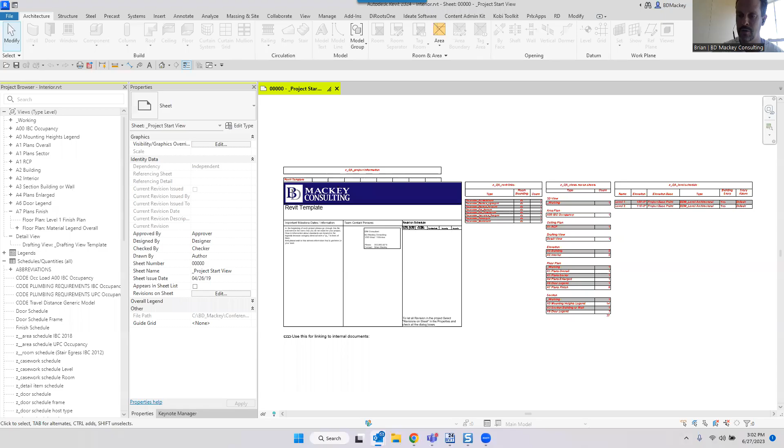So thank you, everybody. She just got back yesterday from a well-worked trip at BILT, where she is on the committee, and she does crack the whip for all of us slacky speakers. No, Melissa, I still haven't put my PowerPoints up there. So she's a little bit... I just finally got back from that thing. And for those of you who do or don't know what the BILT Conference is, I just want to give a shout out to them, because being behind the scenes, as my wife is the chairperson, I know how hard the people had to work this year because there was no staff to actually help them. So it was pretty much put on this year 100% by volunteer work and no paid staff. So thank you to all of them. We had like 2 marketing people. 2 marketing people. There you go. But they were the marketing. The rest of us are just suckers. Dedicated to their profession. Yeah, AKA suckers.

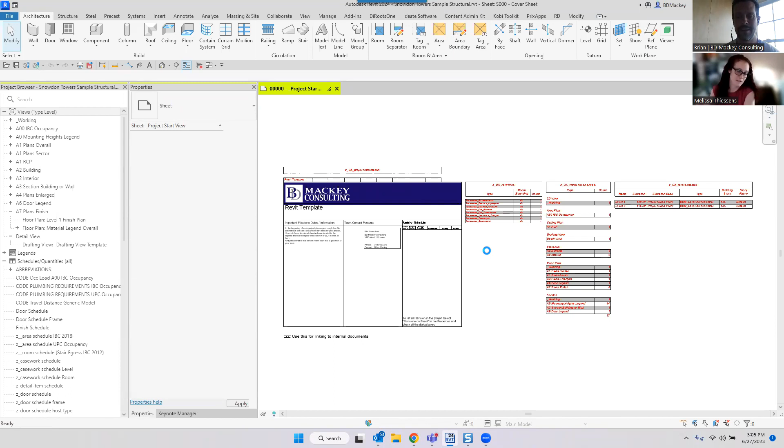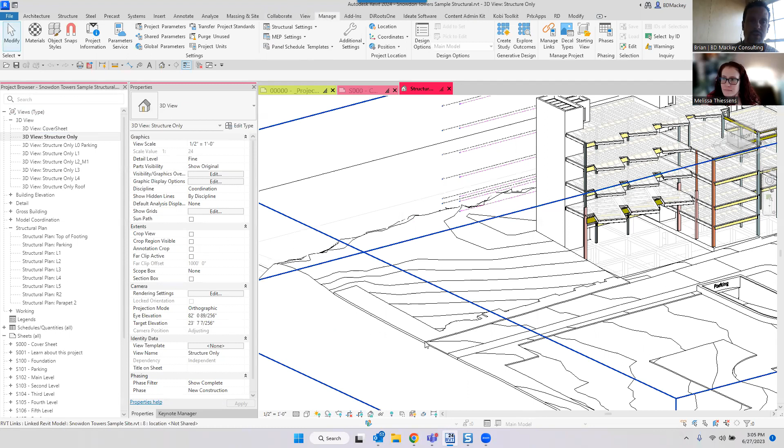But we always describe a filter as nothing more than a query into the database, right? A filter says, hey, I am going to look into the database and find what's going on in that database. So first I am going to turn off the site link. Like on any other project, the site link file got put in at the very end and it showed up on every single view. So I'm just going to unload that one. Cool. Go away everywhere, I don't want to see you. And then in this view, I am going to turn on the Revit link for the mechanical files. HVAC.

So the reason why I'm turning this on is you can see inside of mine, and this is something, like I said, I did bring it up and everybody's like, oh my God, how did you do that? Often I get a complaint from everybody talking about every time they link in the MEP, all of their stuff is in color. Why is their stuff all in color?

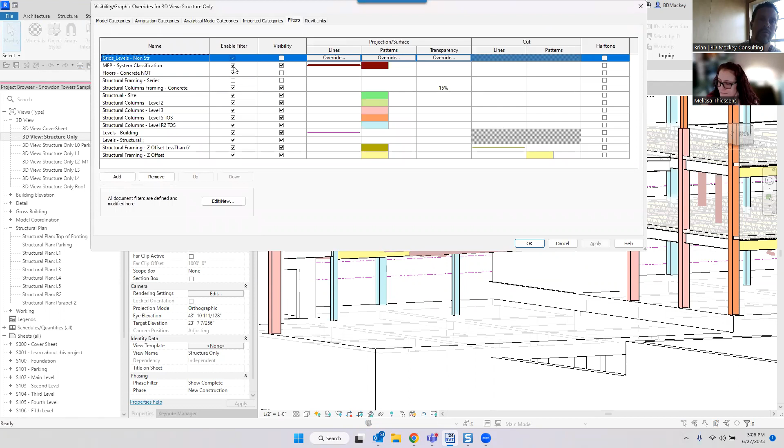Well, I have one in here for my MEP classification. I'm just going to go disable the functionality, right? Because MEP has different rules, right? Hey, it's red if it's hot, it's blue if it's cold, supply air versus return air. All of these different rules to color code it so they can understand what a round duct is, right? Unfortunately, that does come through into all of our links when we link it in.

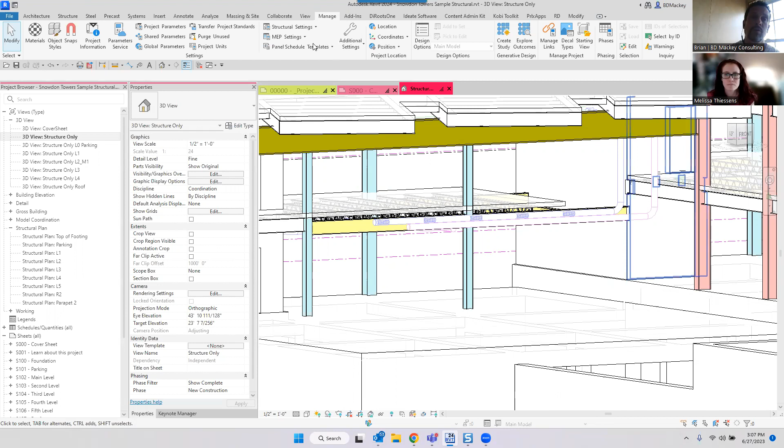So one of the things for me is I create a filter to do this. And honest truth, this is the only way I know how to do this from the linked file without having to go in and manually override linked files. I created a filter for this. So if I come over here and I look at this, and I know I have a couple of MEP folk on here, you might tell me I'm missing a category, but I have one down here called MEP, and I called it system classification.

So basically what I did on this filter is I created a filter and I assigned it to all of the MEP stuff that I could find, and there might be more in 24, since I created this probably in like 21. It has a property called system classification. So the way these things are color coded in the MEP file is they're using the system classification. Even if they're not, I don't care. In the MEP file, they have a value called system classification.

And what's great about system classification is it has to have a value. So you cannot create a piece of duct or a piece of pipe without saying what that system classification is. It's going to have some sort of classification that makes sense in the MEP world. Doesn't necessarily make sense in my brain, but it makes sense in there. So all I have to do is say, hey, is that value greater than blank? They cannot leave it blank. So therefore, Revit will always select it.

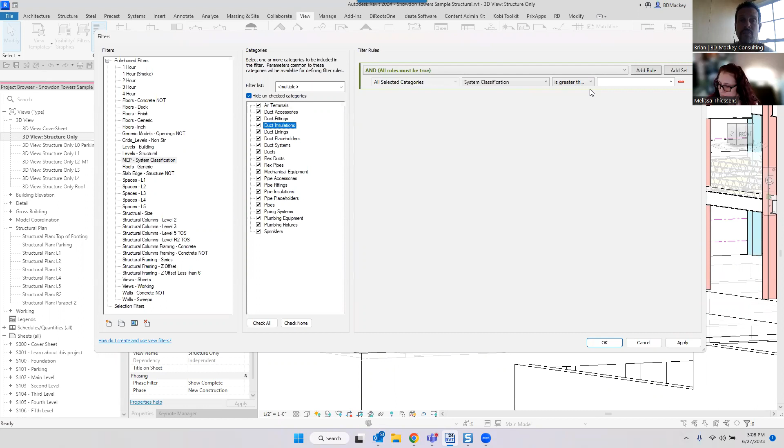And again, you guys can correct me if I'm wrong on this. I have no problem. I don't know everything about the MEP information, so I could totally be speaking wrong. But this has always worked for me. So anything that has a system classification, I did grab all the categories that I thought had it. Like I said, I might have missed some. There might be actually like duct insulation now. No, I actually have that up there. But all of those things, this is just saying, hey, if that classification is greater than blank.

Now what I can do is in my view templates or in each individual view, I can come down here and say, let me go ahead and take that filter, let me add it. And in my case, I turned it red, but in reality, I usually come in here and say, hey, let's just make all of it black. I don't usually change the line weights. I don't usually change the line color or the line patterns. I just say, hey, make everything black for me and we're good.

In this particular case, I did actually go into the patterns. I did want to be able to see them more. So I said, make it a solid color. I made it the same red. And that's how I get rid of all of the crazy blues. They're not even like blues and reds, like off blues and off pinks, just so I could come in and start seeing what's going on with that. So yeah, just wanted to bring that out.

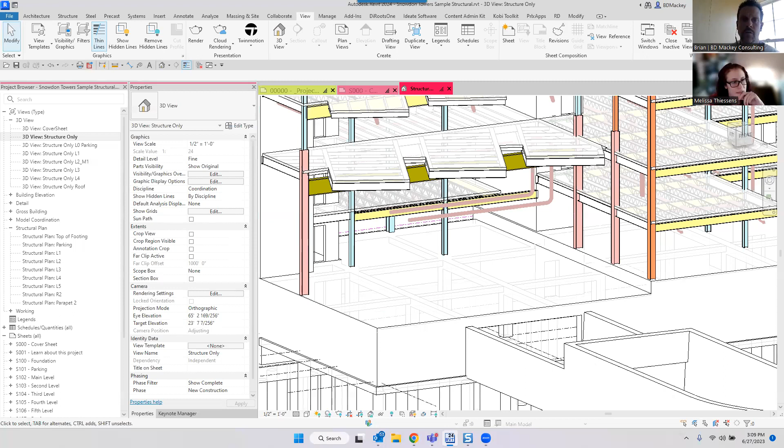Goodness. Oh, Revit screen is frozen. Oh, I clicked on something down below. I probably accidentally paused it. Thank you for saying that to me, Jason. There we go. So I will go back to the screen capture because you guys said you weren't seeing it.

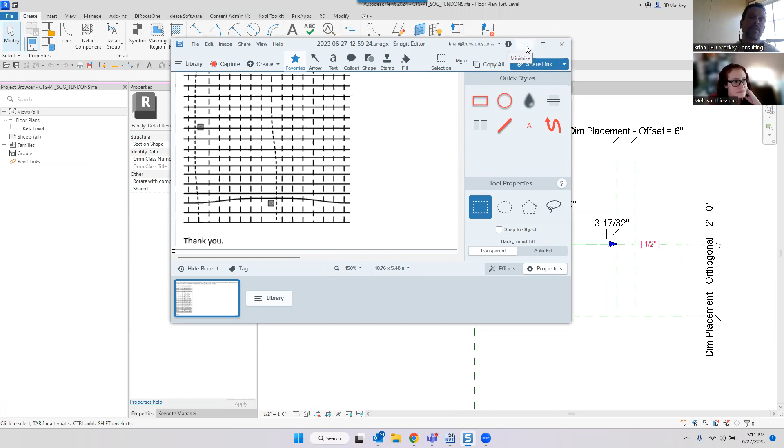So here on the screen capture, it's a detail line in this case, but it's just a line that's either got one jog or a line that's got two jogs, right? I wish tendons is something that Autodesk would address, because I get this question from every single one of my structural engineering firms that do concrete.

So one of the things on that, this is just a line-based component. I'm just going to go in here and hide this category and hide this category. So you can kind of see they've got lines that can turn them on and off. Like I said, I don't think you're going to be able to create one that allows you to do this, and one that allows you to be straight, one that allows a jog, one that allows a second jog.

And the only reason why I'm thinking that would not be possible is simply the fact that since we're going to add curves to this object, you can't make a curve in a regular family go straight. So we can do it if it was an adaptive component family, but we can't do that when it's just a regular family that goes straight.

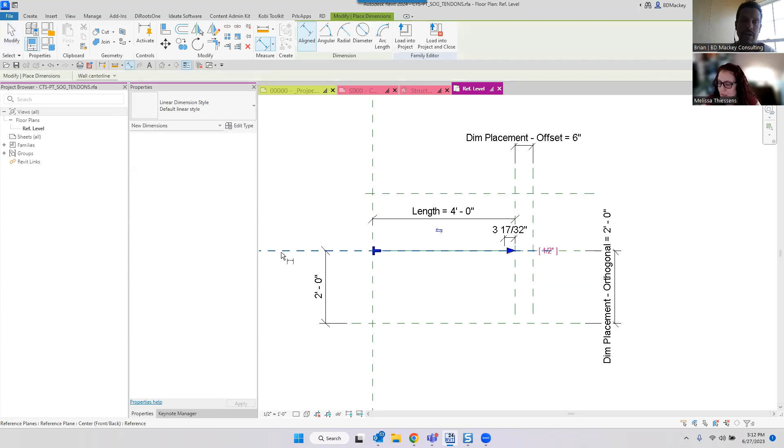So if you're trying to just do this with a detail item, it's literally just going to be taking some other reference planes in here. And I'm totally doing this horribly, but you guys can forgive me. Create a reference plane up here and give yourself an offset value for that reference plane. You're then going to have to start giving yourself length values for the length of this first leg and the length of the second leg. I would dimension those opposite from the ends.

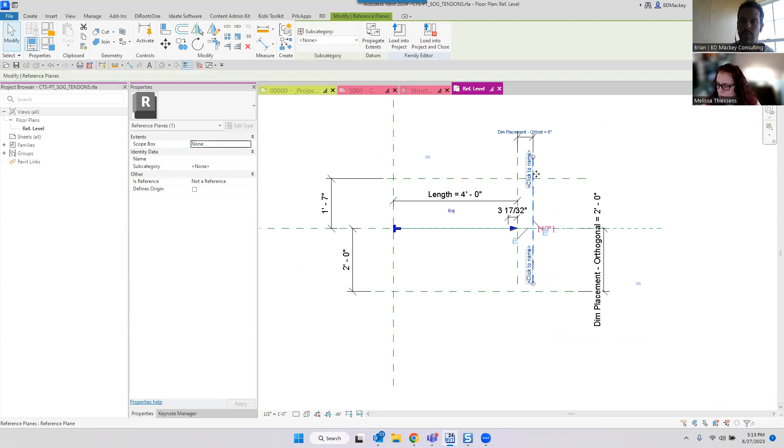And again, I'm doing this horribly because I'm just trying to control drag. That must be the actual one. I'm going to put one here. I'm going to put one here. Once I got that offset in there, I would go in and start doing a reference line between these four reference planes.

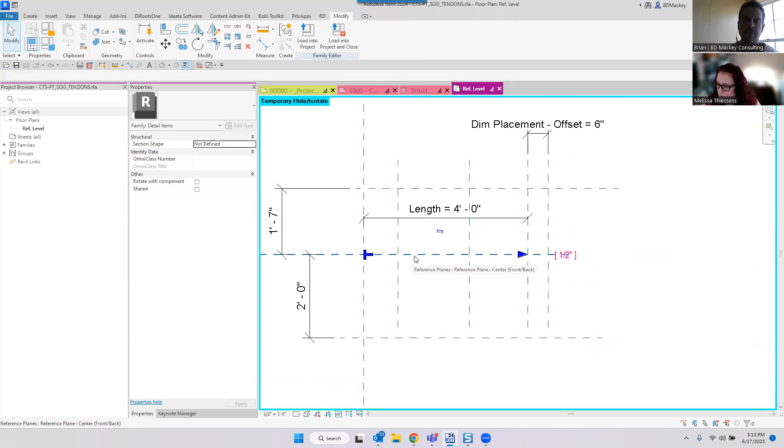There's already a reference plane on here. Could have been the wrong one, but you guys will get the gist of what I'm doing here. So when I'm creating this, I'm going to go ahead and do a reference line on this. And the reason why I'm doing this reference line is I can align and lock all of the endpoints.

So I can align and lock that endpoint. I can align and lock, oops, I already did the vertical, this endpoint to here. And I can do it on both portions of this, right? Now that I've done that, I can draw a detail line and align it and lock it to this. Then you could do a fillet where you're going to fillet these ones.

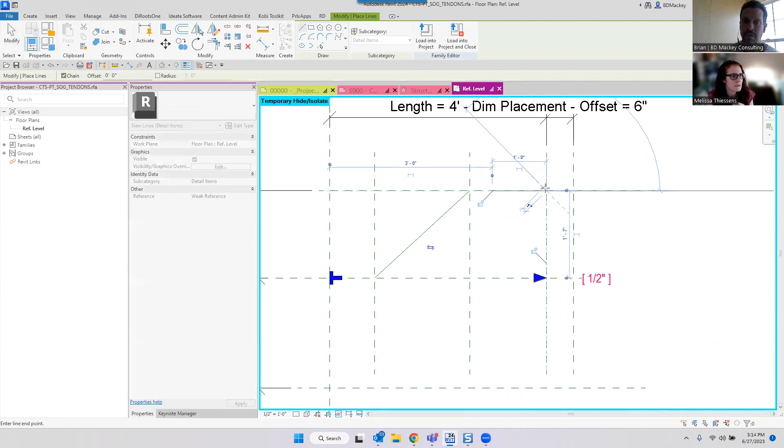So I'm not going to go through the whole process here. Pull this dimension out, right? So then I can come down here. I'm going to go create a line, right? I'm just going to fake this in here. Why is my chain turned on? The chain was on. I got to come back and align and lock it. And its endpoint. And I would do another detail line here to here and lock that.

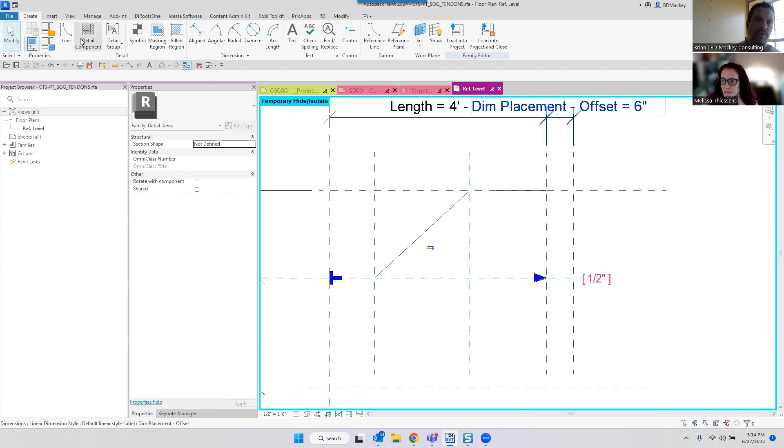And then I'd be filleting this. So if I go create another line, use my fillet arc. Fillet arc should be right there. We'll put a radius of like 1 inch on this. And just say, hey, go from here to here. The key thing when doing this then is just doing a tangent lock and a tangent lock here.

So then if I start coming in here, you're in the project, you adjust this value to be whatever you want it to be, you start coming down and doing this, that's still going to maintain the tangent lock and start figuring out where that needs to go. So doing the tangent lock here and the tangent lock down here.

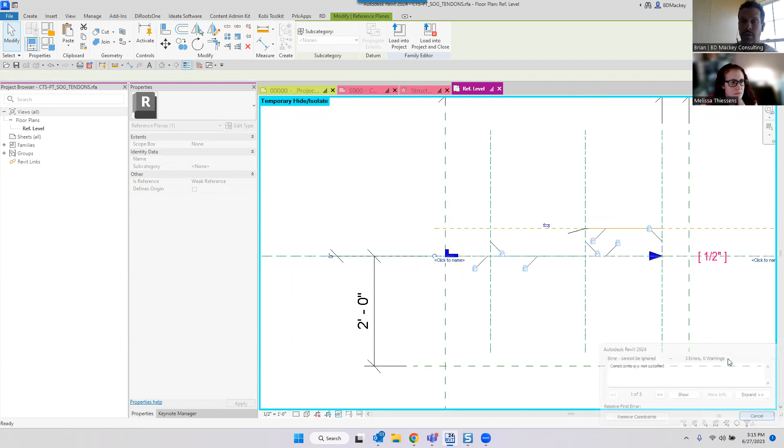But again, if I were to come back here and say, no, I wanted that value to be 0, it is going to blow up because it can't keep this line tangent and arc. Revit will not take a curve and make it go straight. So not able to do that. You could basically go in and put a user value in, you can't do 0, but I could make this 1/32 of an inch.

So maybe nobody would notice that you're going to have a jog. You'd have to figure out what that needs to be to keep this curve going. But you could make it some sort of value, and they're probably not going to be acceptable. So that's where I was saying, if it was me, I would just have one that's aligned, one that's got one jog, and another one that would then do that same jog coming.

So unless anybody has anything other to say on that, it's basically how I would be doing this. And I'd add a flip control going the other way. So if you needed to mirror it after you drew it, you could do that as well.

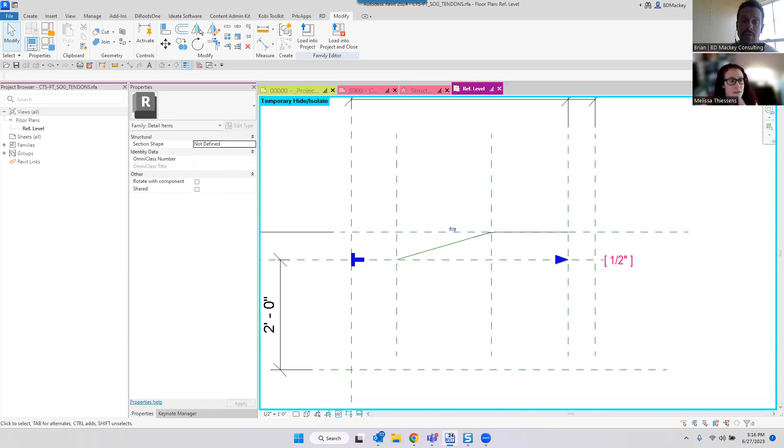But yeah, there's been that holy grail trying to figure these things out of, gee, how do I do something like this? I've tried playing with like adaptive components and placing it and having like straight lines and then curved lines or just it as a spline, but it's really hard to maintain it, to keep it straight if you're doing it as a spline.

I've tried a whole bunch of different ways, and basically a simple detail component like this with the offset and just tangent arcs is how I've accomplished this. And again, just different families, a straight, a double curve, or curve back, you could call it. You can make that just be the same.

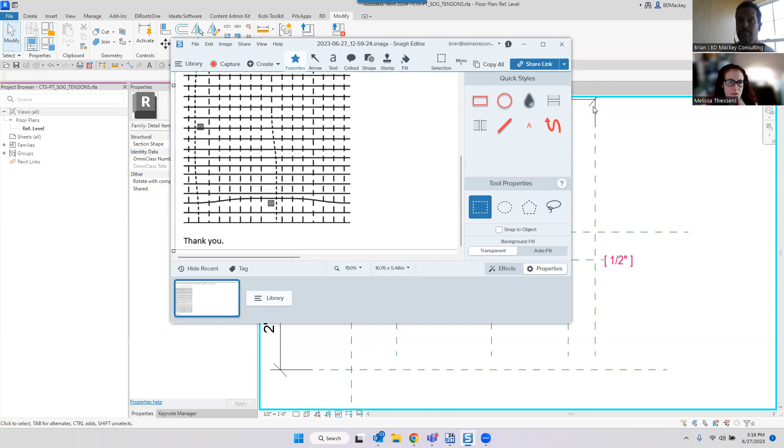I have found actually that most of my structural engineers actually just export out of their analytical program these lines to DWG, and then they link in the DWG specific to the tendon view only. And then what they end up doing, similar to what you see here, is just adding Revit tags. So it's a Revit thing that they put at the end of all of the DWG lines that also has the data you're looking for here.

So that would be the other alternative. But if you don't want to bring in that DWG theory, that's your native Revit stuff. So Nick, that came from you. I hope that answers your question.

Well, it kind of goes into Chris's. Would you recommend doing tendon layout plans as detail lines or items, or do you model tendons? So yeah, the whole modeling of the tendons was the theory of why I did it as an adaptive component, because then we could go through and get that tendon modeled in there. This is one of those ones to me that

it's always hard to say yes or no, because yes, I would love to have these modeled, but even if you model it, it's not going to really be where it is. You're still going to have to use ground penetrating radar if you ever want to cut a hole through there. Sure, it would be nice, but I also sometimes feel like these types of things add additional conflicts or constructability issues. When it's literally a tendon, they can be shifted and moved around things by an inch or so. They just kind of go around them.

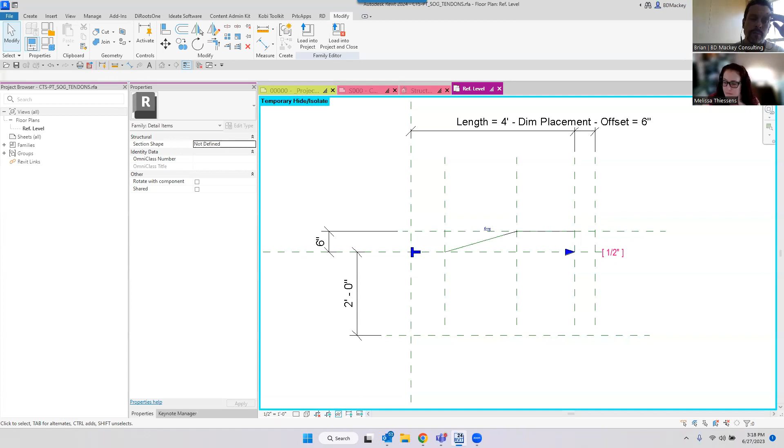So for me, in that scenario, if you could try to model them, you could technically do the same thing with a 3D line-based object. If you really wanted to model it in 3D, just use the 3D line-based object as opposed to the detail item line-based, and then just host it to the top of the slab, and then you could have the actual sweep be hosted down however far you want to go down. So you could say, hey, let me just put this on top of the slab.

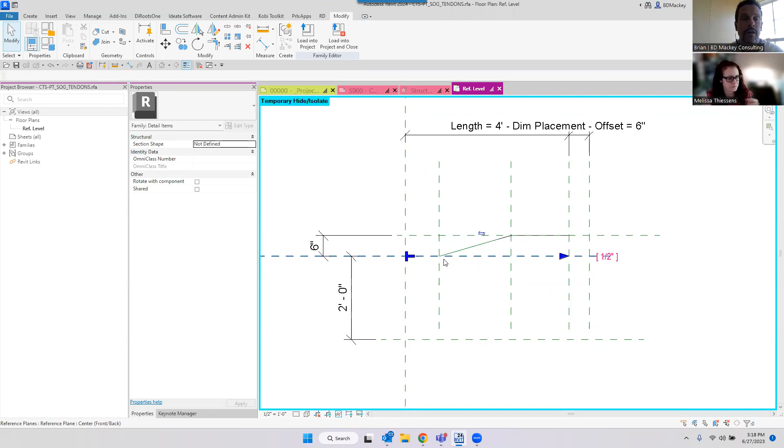Let me draw this same exact scenario, but this would be a sweep rather than detail lines. Sweep a little circle on that path, and you could model it 3D. And line-based families will always pick up on a host unless you say otherwise, so you could technically even host it to the slab if you wanted to. So yes, Chris, if you wanted to, go to town. It's literally not going to be any different if you're drawing them all, and it might be nice to have it. Up to you if you then want to do the 3D connections for the beginning and the end of the tendons.

And you would still nest in your symbols. These symbols would be set to only see these in a coarse level of detail. And then you could also, in your visibility graphics, say only see those in a coarse level of detail, because they're stuff that's nested in. In this case, it is a 2D symbol, a generic annotation. So you would see the symbol in plan, but the 3D object in 3D.

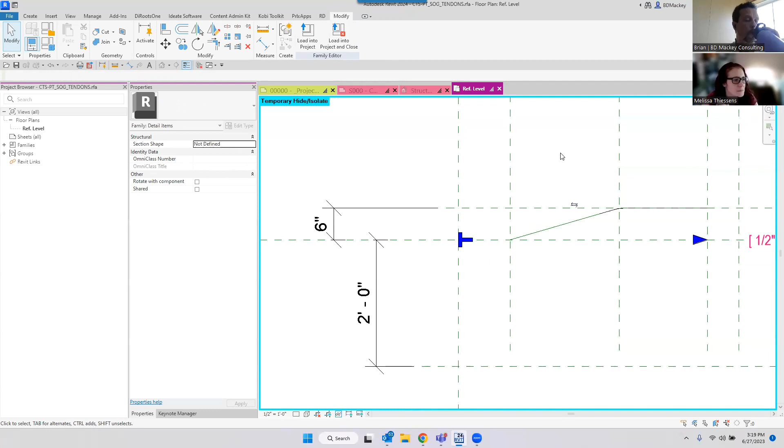So exciting. Nick says, yeah, that gives them some other ideas. So cool. What else we got there, Melissa? Let's see. Just see if there's any that slightly follow on with that.

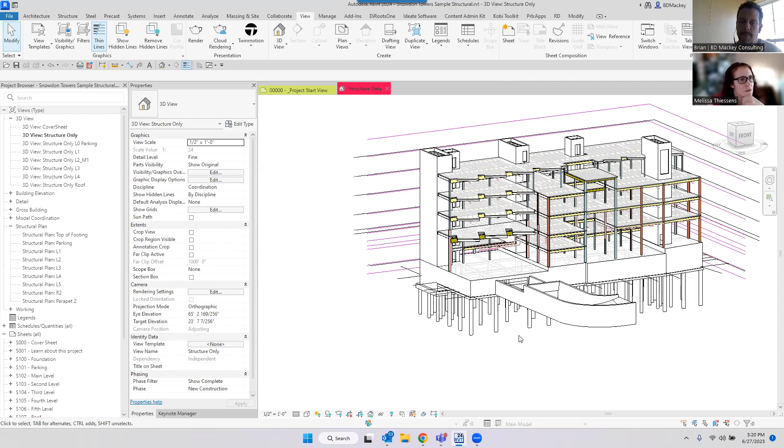Oh, kind of back to the filters thing, Bud's saying, is it only mechanical and plumbing that requires system classification? I use multiple filters, so I can also include electrical, such as light fixtures, to differentiate between the electrical model and architectural model. So it was funny. I don't know if this broke in 24. I tried this the other day in 24 and I could not get it to work, but I used it when I was creating this file. We created it in Revit 23.

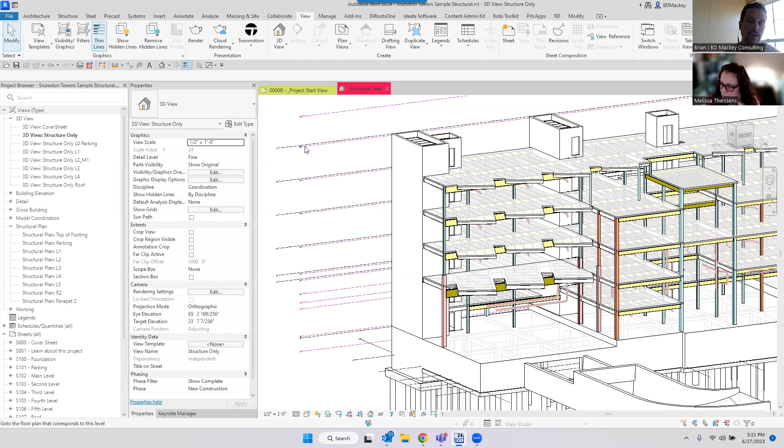But one thing I actually do often is when you start linking in projects and you have worksets, I would always move my links to a workset called Revit links or Z Revit link MEP, whatever. And so I used to create a filter on anything whose workset begins with Z. This doesn't have worksets enabled, so I can't show it. When you're doing a filter, you can grab every category, and the only property that comes up when you grab every category is workset. So I basically said Revit workset begins with Z link.

And part of the reason why I did this, I actually learned from somebody I was working with, they did this for everything. The real reason was I then set all my Revit links to be really thin line weight. So even if I come into a floor plan and I have those linked models in the floor plan, come down here to the working plans. Even if I go in and set those up, the linked models still have the fat line weights.

So I can say, hey, make those all halftoned, but they all have fat line weights. So the halftone fat line weights half the time are graying out my stuff. But when I was able to go in and say, hey, find the work set that begins with Z Revit, because that's what I call my linking work sets, then I could say, hey, add that filter, make everything be a line weight of 1. So I could basically put all of my links into a thin line scenario.

That did not work for me the other day in 24, and I've not tried getting into it. So I don't know, I guess maybe I could just go enable work sharing here. We'll try it real quick. Work sets. I'm so not used to all these new icons at the bottom of the screen. Sure, levels and grids, work set 1. Yeah, so I used that all the time in 23 and prior, and I was just working in a client's project the other day in 24, and I don't know if I was just not paying attention.

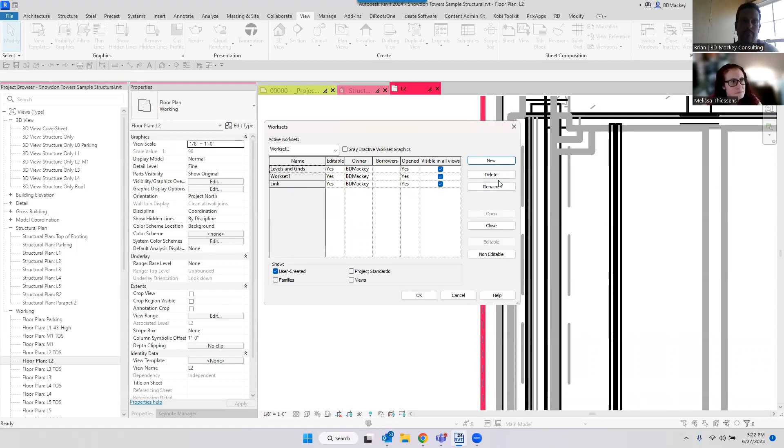New link. I can call this one link. The thing I also tell people is when you're working with links, I always see people trying to tab select and try coming around all day trying to grab their linked files. Do you realize you can always just come in the project browser and say, hey, let me select all the links in the entire project?

One reason I like doing it this way is I often do this in clients' projects, and I find that they have two. Like somebody was copying something and they copied a second version of that thing inside of there. And you're kind of like, dude, did you realize that you copied that over there twice?

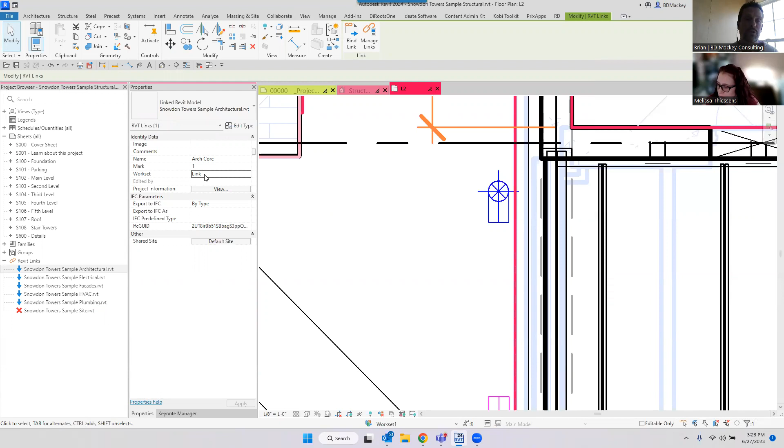Also, the thing to take into consideration is linked Revit files have an instance-based work set as well as a type-based work set. So if you are changing link files to a linked work set and you didn't have that work set active when you linked them, just do realize that you can change it here. This is the instance base, but you also have the capability to have a type-based work set as well. And the reason why I'm bringing that up is this is for like multifamily stuff.

We use this quite often in multifamily, we'd have a typical unit A, right? And unit A might be linked into the project 400 times. I don't need to see it 400 times. So I could put it in there called unit links, and that's the type work set. Then each individual link, if I wanted to, I put them on like level 1 links, level 2 links, level 3 links. So I could control which links I was seeing via work sets when opening the project if I knew that day I was going to be working on level 1.

So you can have instance versus type based when you load your work sets or open your work sets upon working in Revit. So manage view template, not view templates, filters. Filters, new, links. We're just going to place it. And I literally would say check all. And then you will see in here, the only thing that comes up is work sets. I'm going to say contains, I think I had a capital L in that. We'll find out. Contains link.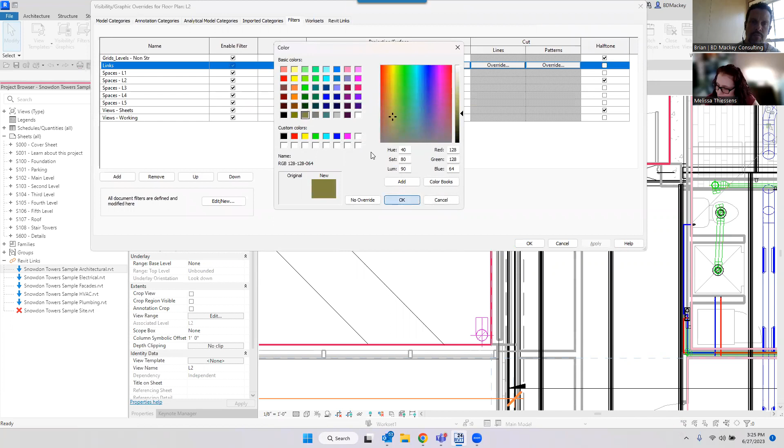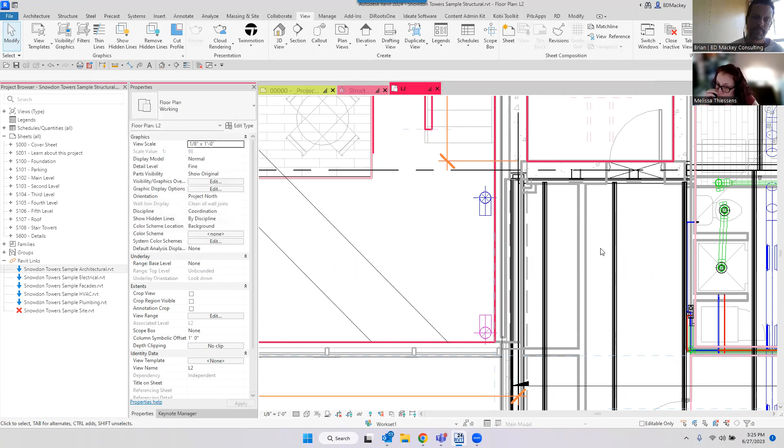You see, now this is not working. This used to work in 23. And it is a capital L. I did get my filter that way. So this used to work in 23. That literally was how I did this. And Bud's saying he's never been able to get this to work. Yeah, because it should look at this link first and turn everything there.

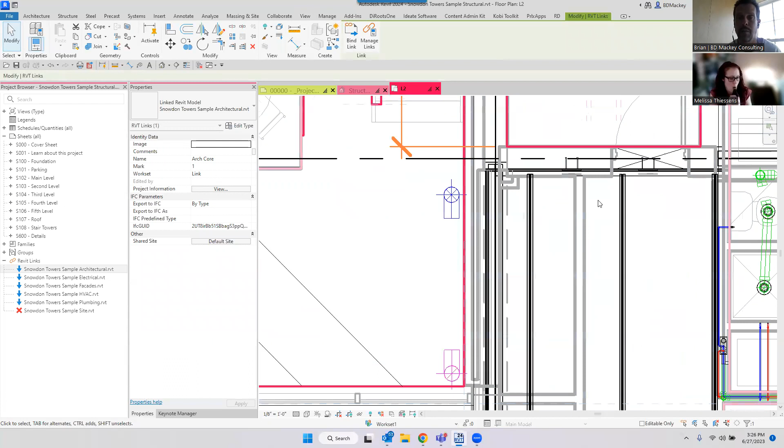And then if I tab select and get the elements, these elements don't even have work sets because it's not a work shared project. But when I was modeling this, granted everything had work sets, that's what I did. And I tried this in 24 and I could not get it to work. Bud's saying he's never been able to get it to work.

So do everything that's not links. But Bud said he did it slightly different. Filters. Let me find my one called links. If I say doesn't contain, I can't make the ones that do contain. And let's try it as equals.

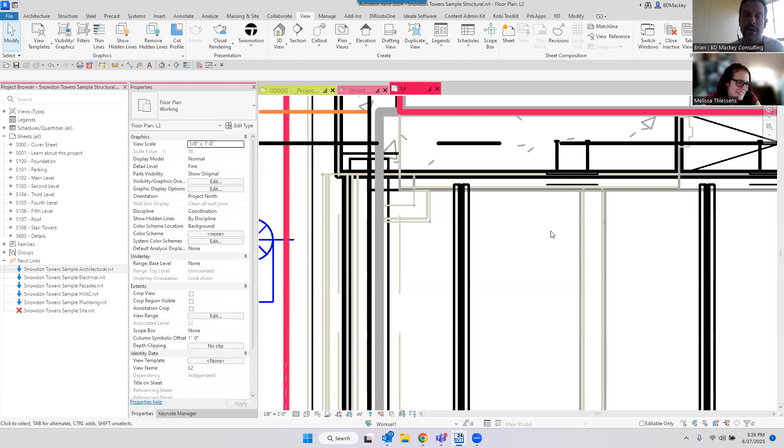So it has to equal exactly. So guess what? Contains doesn't work. It has to equal. So there you go. That's what I was doing wrong the other day. Guess I just got lucky before. So there you go, Bud. Does that work for you? Can't say contains. You have to say equal. So I guess you could create or equals, especially since we're in here.

So if you had Z links, architecture, Z links, MEP, Z links, et cetera, in your filter, since we have the ors now, you could say it's an or rule and keep adding the rules. Oops, grab the right one. All the rules. Work set should be an or, add rule, or work set equals whatever the next one's gonna be, et cetera.

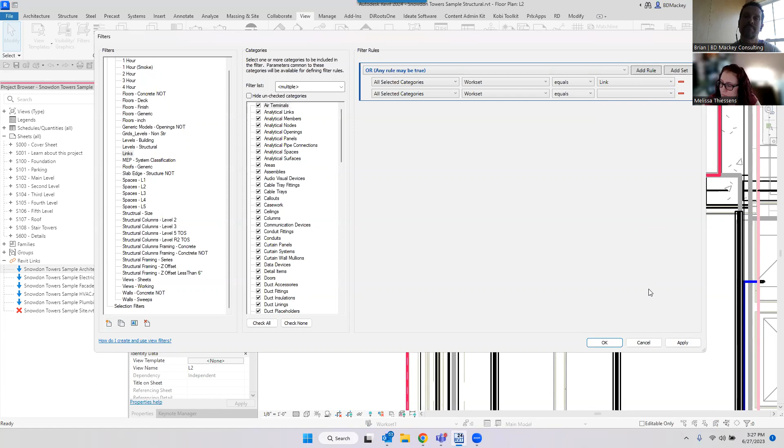Yeah, so that's a tip that I also use filters for, that I can kind of get these into thin lines, and therefore you can start to see that, oh, the gray stuff is gonna be on top of, but it's not covering, and it's not the same line weight, et cetera, as my stuff.

So yes, I forget who that original question was from, saying about the electrical, plumbing, all of that stuff. I use filters all day long through linked files. I just do it all the time. Again, I don't want to see this here. They've got green, blue. This project in particular, since the files were still linked in here, like the architectural model had floors that had the inch mark in them. So I wanted to be able to turn off the architectural.

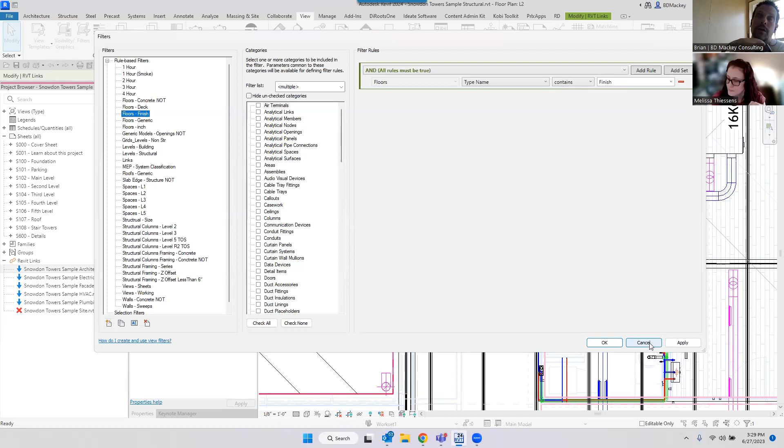Also, sometimes I might ask the architect, especially for MEP folk, a lot of the architects use filters to color code their walls. They might be using a custom project parameter, and I do this for a lot of my architects, I literally have a Revit file that has the parameters they have for walls, because you need those parameters. And then also has all the filters they use for all of their code walls. Like my client might have their own fire rating, code fire rating, or whatever it's going to be. And they assign that to doors, walls, windows, whatever. So I need that parameter in my project.

But then I also have my architects have a file that's literally the project parameters that they use for that, as well as the filters. And then you can just import that across. You'll get all the filters they have. You'll get actually a view template, so you get the coding to it as well. And then you can just apply it. So you, as an MEP person, can start seeing all of the rated walls.

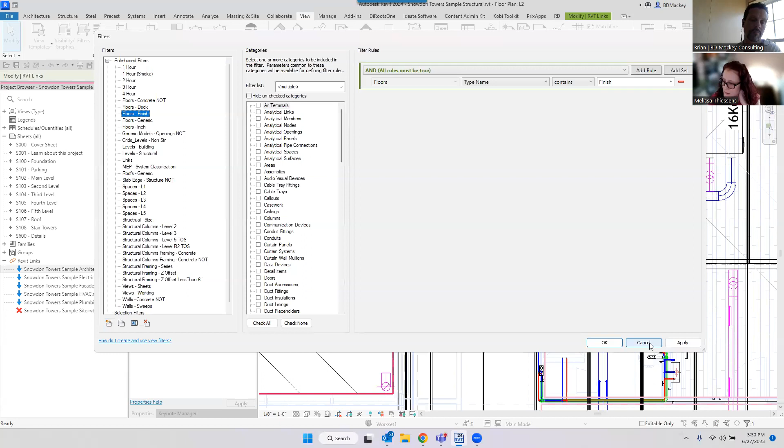But because most people are not using the out-of-the-box parameter, you do have to have in your file that shared parameter, that project parameter, whatever it is they might be using, so it has to be there for the filters to look at it. Right? So filters work through links. Start taking advantage of them. Definitely.

Marta was asking if the work sets instance and type were a 24 feature, and then noticed that it is in 23. But I think the instance and type has been around as long as I can remember. Always been there. I started Revit in 2004, version 7 something, and it was there then.

It's also there for CAD links. So if you had a CAD link in there, you could select your CAD link. This project doesn't have any, and you also have instance and type based CAD links as well. Technically, everything has an instance and a type based work set. Like if I were to grab this, it's not in my file. Let me grab something in my file, right? This structural column, it's on work set 1, but the structural column itself is a work set.

You don't see it in here. You don't see it come up here and think about it all of the time, but the column itself, the family type, is a type-based work set. That's why when you're loading in a family, it says, oh, this work set is not editable. Would you like to make it editable? Because you haven't checked out the type work set for that family, right?

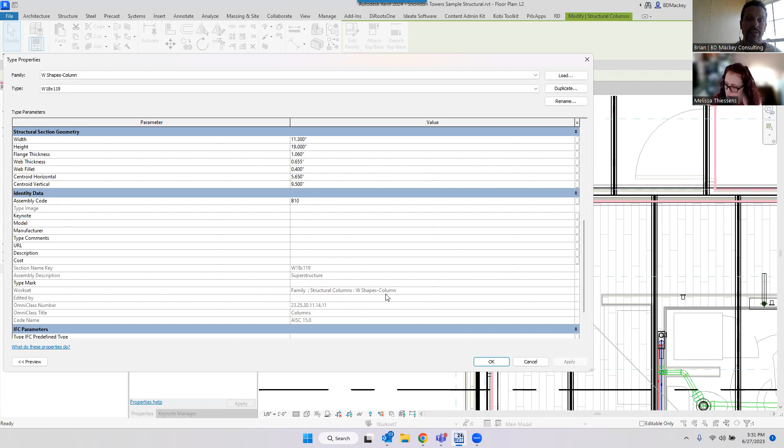So this is the work set that it is. The family is called W Shapes-Column, right? If I just cancel out of this, it's called W Shapes-Column. Every single element has a type and an instance-based work set. When Autodesk gave us the capability to schedule work sets, they're only scheduling the instance based. We cannot schedule the type-based work sets.

I asked that question, like, we can schedule work sets in instance or type. Like, what do you mean? Like, everything has 2 work sets. The instance, so basically just the user created is what we see, right? Basically, yes, because the other thing on top of that, and you guys have probably seen this if you're using any add-in utility, every view is its own work set.

If you come down here to the work sets dialog box, not many users I discover ever see that there's 4 checkboxes down here. They call them user created. These are modeling work sets, the work sets that the modeled elements go on. But if I uncheck that and come down here to families, every single family is a work set. Generic annotations, 3D, every family, these are type work sets or type-based work sets.

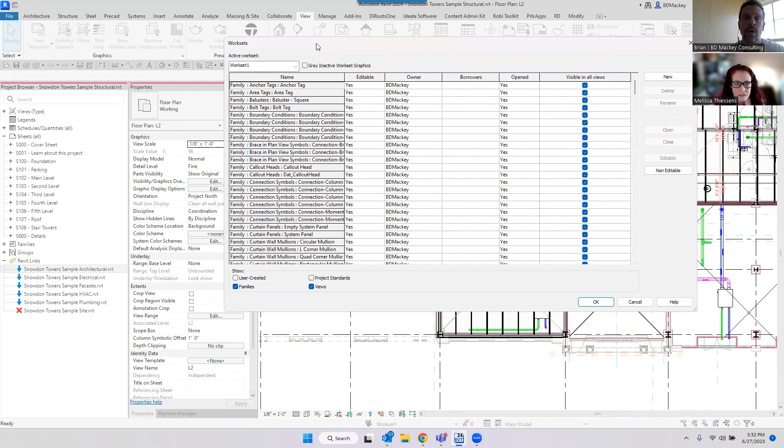Every view is its own work set. That's why you get the error warning: oh, you can't accept this design option, or I got to delete this tag. This tag is called view blah, blah, blah, because the tag's instance-based work set is the view it's placed into. So every view, every sheet is a work set. All of your project standards are also a work set.

So if somebody goes in to edit the analysis display style, they check that out. No one else can go currently edit the analysis display styles. Right? All the duct sizes, if you're an MEP person, somebody goes in, starts manipulating duct sizes, that person owns the duct sizes until they synchronize and relinquish their rights. They own that stuff. So it's not just the instance-based, these 3 ones down here are all type-based sets.

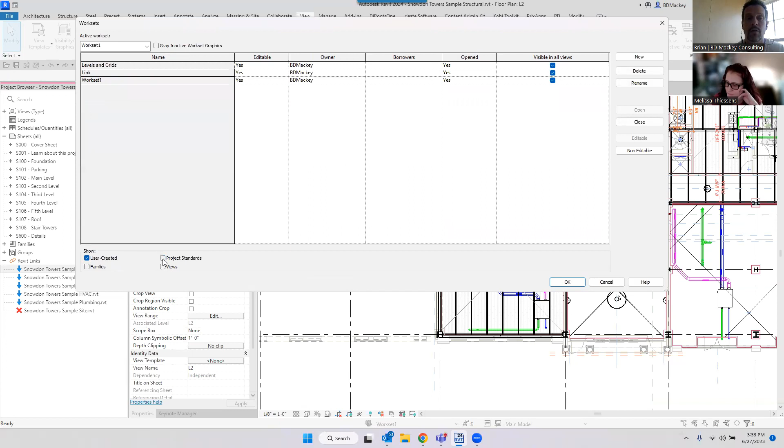Right? Which is the other reason why I always tell people, and this is going to be the same way. I got to save this file because I added work sets. I don't want it in the sample file anymore. We'll go into the temp folder. Delete. So once this saves, I'm currently the owner of every single element in this. Not only the instance, but the type based. You can't even change the project information until I go to synchronize.

So one of the big things to me is I had a client where this one user always hit synchronize now. Synchronize now is cool, it does not open up this dialog box. How many times have you hit synchronize, got up, went to get coffee, come back 20 minutes later, and this dialog box is sitting there, like, oh, I forgot to hit that. But the reason I always tell people not to use sync now is it might not allow you to uncheck any of these things up here.

Synchronize now does not automatically give up your rights. It remembers your last setting. And if my last setting was only checking user created work sets, but all of a sudden I took on project standards, I will still own the project standards. So synchronize now, I tell everybody do not use. Come in here and use the user created work sets. It's nice.

You can then synchronize and modify. You can come in here and change all your settings and make sure you're giving up your rights to every single element. And if you're actually using shared coordinates and you acquire shared coordinates, you take one of the project standard worksets out of it. I know this because several of my clients owned their standards and they can't go change the project name or anything like that. So just be aware you do have that, and make sure you're always going in and hitting that synchronize, not the synchronize now.

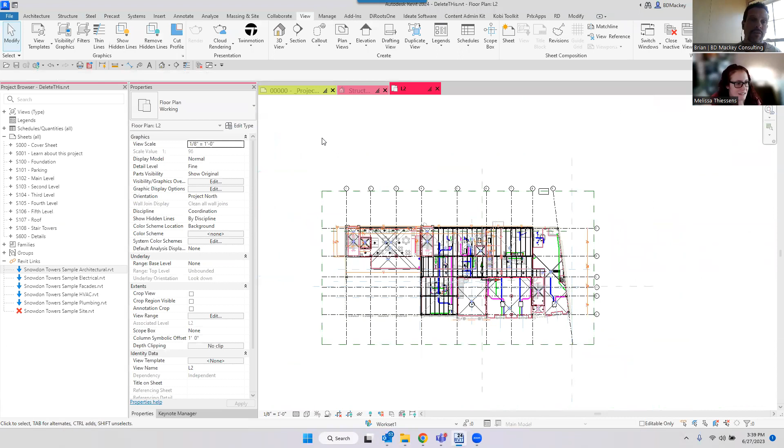Yeah, somebody's like, yeah, I played the GUID hunt before to figure out which Revit file is which. Autodesk is actually trying to come up with a way, at least on the home tab in Revit. They had said they were working on this. I'm not saying they're actually going to do it, but on the home tab in Revit, they were going to do something where you could right click and see the GUID number, or if you just hovered over it, it would give you the GUID as well. They haven't done that yet, and I'm like, why? I would think that would be a really easy thing just to list the freaking GUID at the very bottom to tell me, hey, here's what that element is.

I haven't, but they keep telling. I also want them to give me a right click open file location. I really would love that as well, like every other program in the world has. So, but that's it. So it could be that.

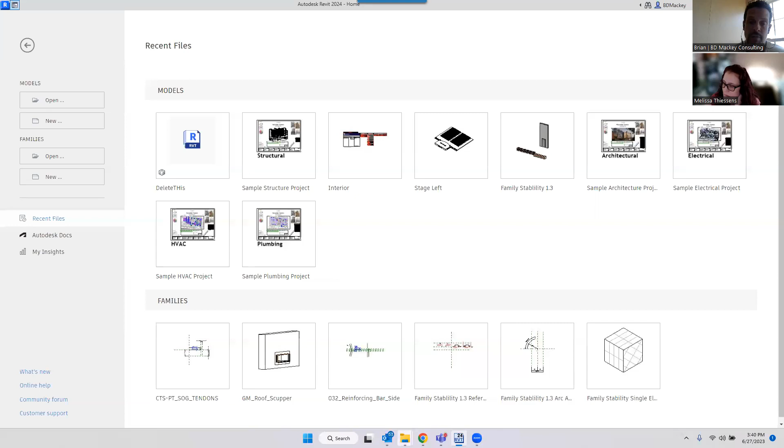The other thing I have found, as of like 21 or 22, I forget which, in the parent folder you can see there's a CEF cache. I delete everything under here too. Because I've had clients delete the cache, open the file, still same issue. Delete the cache again, same issue. Let's open the CEF cache, delete everything under there. I honestly have no idea what's in the CEF cache, but I have found that deleting this allows users to do it. So in that version of Revit, I delete everything under the user's profile. Might as well keep the user, but if you don't want to, fine. I delete collaboration cache, everything under CEF cache, and everything under journals.

Reason why I say this, and it doesn't do this as bad with BIM 360 projects, but every time you open up something in Revit that's non-BIM 360, it adds that file to the cache folder. I have seen this be 90 gigs on people's computers for one version of Revit. So I also have a shortcut on my desktop that deletes everything in this journals folder. As long as you don't have that version of Revit open, you're fine to go in and shift delete. Everything's gone. Now I have an empty journals folder.

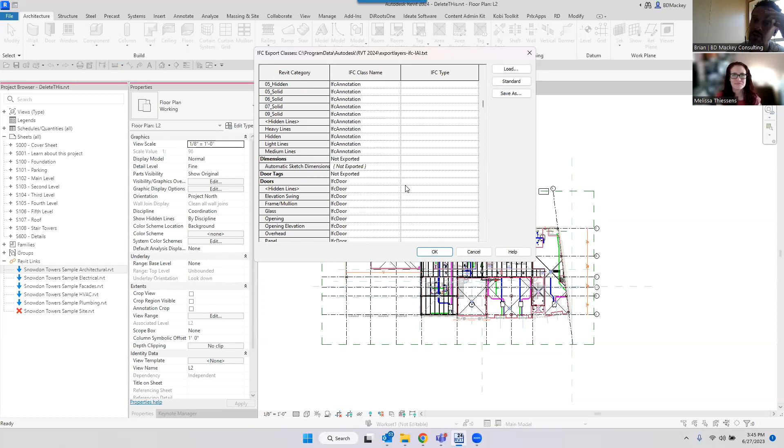Yeah, you have the option. So somebody has to go through in the company who's doing it, and the problem is you have to spell. So if you misspelled structural, like I did, I'm gonna say go out as an IFC curtain wall, IFC is gonna say this doesn't exist. It's gonna put that stuff all as building proxy element, which then comes in, I believe, as a generic model. So more than likely, it's the export the person's doing.

I also put in Twitter, I believe that Autodesk has an IFC in the App Store. Go look for the new IFC exporter, they call it, but it also helps import IFCs as well. This is America. Do we use IFCs?

See, actually, I don't think it was last Revit Radio. I was talking to a particular client, Jason, you're MEP, so I don't know if this is the case, but there is a new file format, or new to me, that the fabrication tools in Revit can import, like an MLG or MG something file format. So if somebody's working in like CAD duct or CAD pipe, it can link out to that file format and the fabrication tools will bring that file format in. I have no idea how.

I Googled it because I was with a client like, oh yeah, we're bringing in this file. I'm like, wait, what? What is that file type? I've never heard of this. And so they kind of walked me through it, and they were an MEP design firm, and they were bringing it in from the fabricators. I have no idea what that file type was, but something to look at. They're like, yeah, you just do it through the fabrication tools. I'm like, I don't know what tools. And I Googled it and it said it worked. I just didn't ever try any of it. So theoretically, there's a way to bring that in from the Revit side as well.

So if it's all MEP stuff, maybe you don't need the Revit, or you don't need the IFC. You can have them export to that file type. So your official answer is go find this mystery file type and hope that works. Is that what I'm hearing? I don't know what he's exactly looking for. My gut is telling me it's the architect who's just exporting it wrong. All I got.

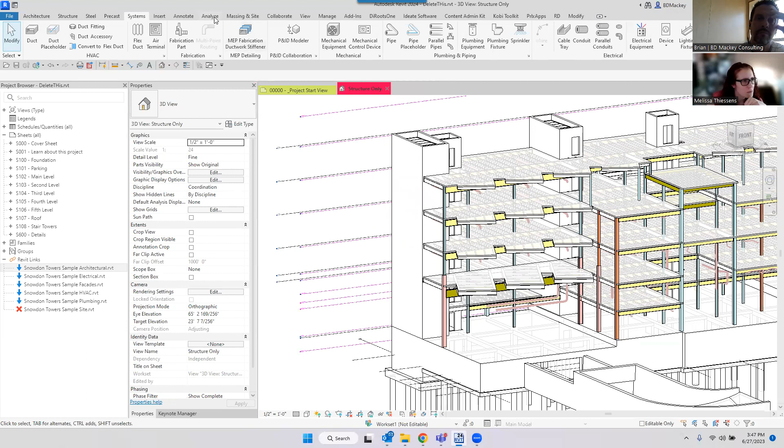Here's one from Caitlin saying, I haven't had time to research it much yet, other than I had a structural user notice the analytical stuff removed from the base Revit and now in the automation. In my testing, I was not able to get it to work with their dialogue, but it worked fine when I ran it from within Revit.

Yeah, I haven't done too much on the analytical automation yet. I've done a little bit of it, but yes, in Revit 23, I think it was, they completely changed the analytical aspect of Revit for the structural engineers. Before, you modeled a beam, it automatically had this enable analytical model, right? It was the stupidest thing ever, because even if an architect modeled a structural column, it was then analytical. If an architect put a foundation in, it was analytical. And all these analytical lines were automatically being generated, right?

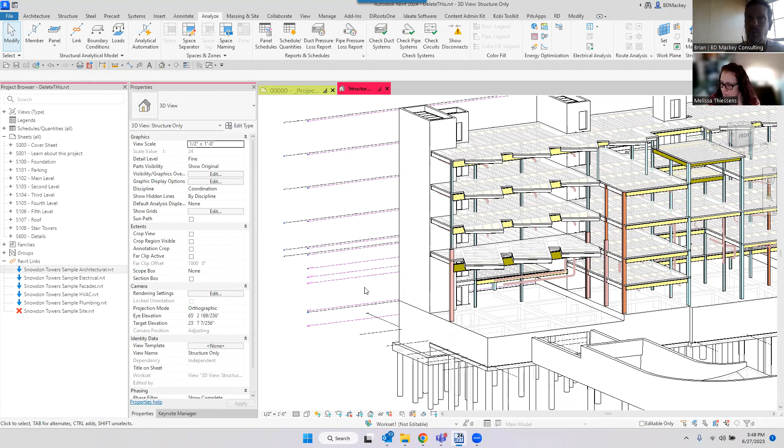5% of the United States market may be utilizing some part of the analytical model in Revit, but 95% of them aren't using it at all. And all that did was slow Revit down. Even for the architects, I had a Dynamo script that would go in and turn off analytical for every structural type member because nobody was using it.

A lot of times people are like, man, I don't get it. I moved this one wall in Revit, it takes forever. Well, yeah, because that wall had analytical enabled. And now it's got to check everything else and not only move the 3D geometry, but also the analytical model. They've broken that. They've changed that.

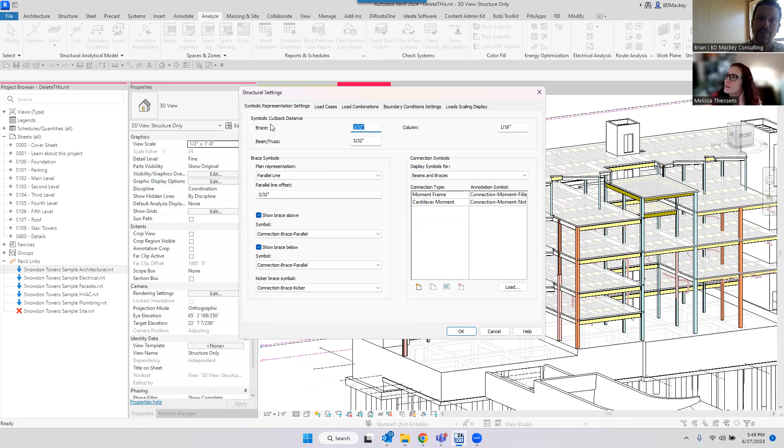So now what you have up here is called your analytical model, and you can actually create and link things to an analytical model. All your structural settings are down here for your cases, combinations, etc. They did change this. It used to be one dialog box. Now it's like 3 or 4. When you come inside of here, it still takes you to the same dialog box, but they added shortcuts for all 4 of them. Same dialog as before.

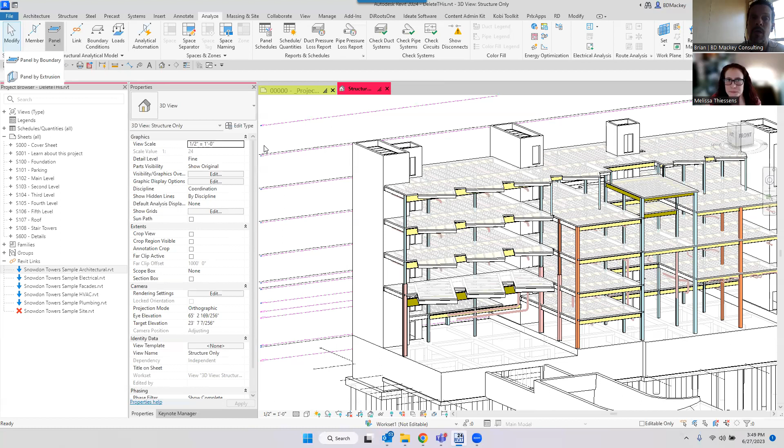But what you can start doing is saying, I want to go create links, boundary conditions. I want to create a panel. What's cool is you could go create a member without ever having to do this. You could technically model a building now in Revit structure without any 3D geometry, just analytical elements. Once you do that, you could then link this object to this analytical element. So if you did model these analytical elements, you then could click, hey, this column actually represents this analytical model as people come back and model it later.

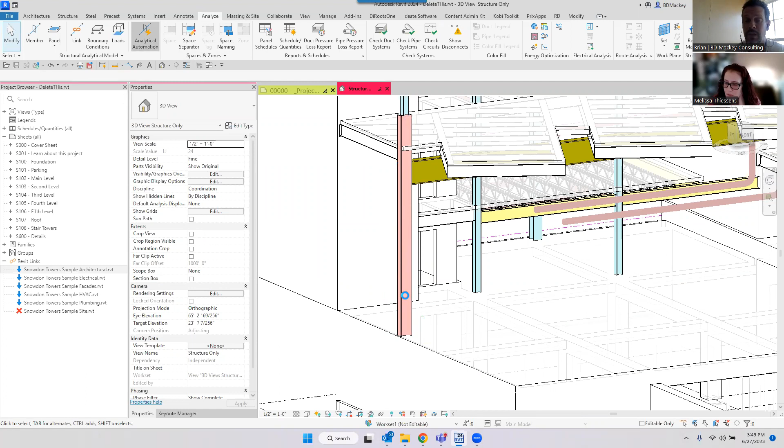They've sped some of that up with the analytical automation. You can come in here and say, okay, what do we want to start analyzing? I've played with this a little bit. I was able to successfully get it in 23 when it came out. I have not played with it since then. Analytical automation, where did it go? There it is. I was like, did it pop up on my 3rd screen that's back in Denver?

So here's where it's asking, are you going physical to analytical for buildings or analytical to physical? If you've modeled the physical things, like what I have here, and want to take it out to analytical models, then you do this. They've created this little Dynamo script to do this. And then theoretically, it's going to give you all of these options. I don't even remember what you have to set in here. You have to select the elements in Revit.

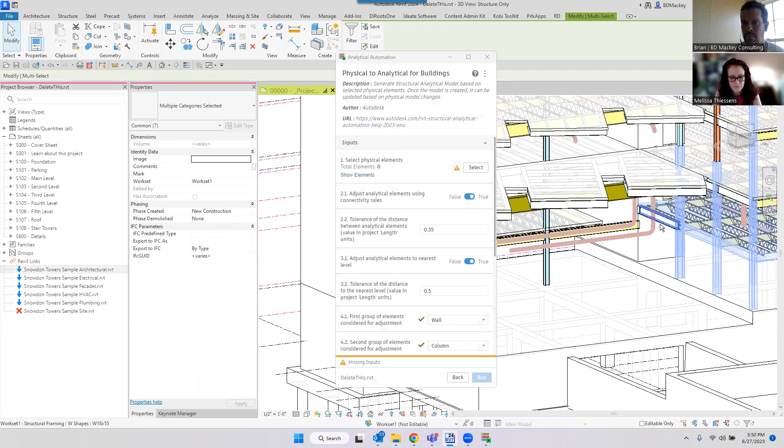We'll just do this. I gotta hold control. We'll do some of the beams. I didn't mean to click the floor, but sure, we'll do the floor and some of the beams. And then we'll say those are selected. Oh crap, I screwed that up.

Missing input. No, I'm just doing columns. Outputs, analytical members, false, false, true. I don't even remember. I was able to do this. I'd have to go back and look at this. Honest truth, I haven't used it because zero of my clients are ever trying to use the analytical inside of Revit. I don't really remember. I know there's something in there.

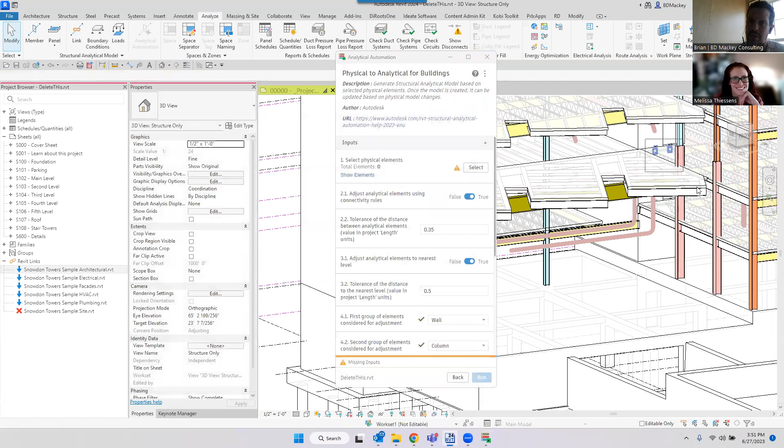Analytical members, and then you hit run. Oh, somebody's saying you have to window select. I had done this before, just manually selecting, but like I said, here we go. Yeah, I still don't get the run. I think I'm missing something. Show elements, they're shown. I don't know what's going on, but maybe it's because I have the analytical turned off or something. I don't remember, but I've done it.

It worked. Then you can do it, or like I said, you can also manually place a member. You're like, hey, I'm going to do an analytical member, top driven, whatever driven. But you can also just pick an element too. Hey, I'm going to go ahead and pick this column. Now I've got my analytical all the way down here, and then you can start doing it.

Theoretically, they're doing this for other European markets because they all hated it, but in the US, like I said, zero people are doing this for me, so I have not jumped into it. But yes, it did completely change in Revit 23. And you do have to work at it a little bit more. It's not just automatic, but theoretically you have more control, more freedom. So Caitlin, hopefully that answers your question. What other questions we got here?

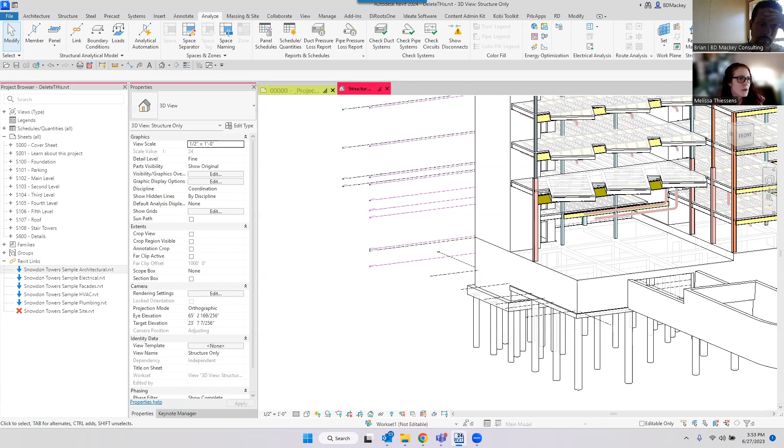We have a roof one from Ryan. So the modify sub elements for roofs and floors changed in 2023.1, which allows you to change elevation base to internal origin, survey point, current level, etc. It no longer is modifying it from its original location. On a large flat roof, however, if you are modifying slopes to drain, you no longer have the original location as an option, making it more difficult to quickly lay those out. Any ideas or thoughts on this?

Yeah, no, you don't. Oh, sorry. There's an also. The reason roofs is more complicated is that the points on roof are offset the thickness of the roof, where floors you are already modifying the top. Okay, now go. Sorry. I've noticed this too in 23.1. When you modify an elevation, they started changing that, I think, because of the topography and the new topo solids we have, that you have current level, survey, or origin, but you don't have what it used to be.

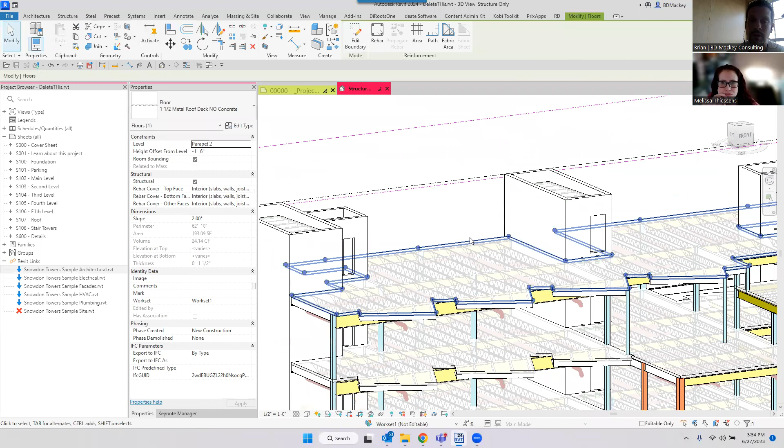So if I go back to current level, sure, this is perfect. The top of this slab is at the level. But if I were to cancel out of that one, I understand the zero, etc. But now I grab this one. Oh, it's sloping. I can't do that one because it's sloping, but let's just take this one and say we're 2 feet up or something. That's great. Now I say modify sub elements. I pick this and now we're at the 2 feet. So now I've got to start doing this math conversion.

Yeah, I thought this was a horrible scenario for what they had. The height offset from level is my floor. So I now have to start subtracting all of this stuff. It drives me crazy, but that's how it's set up. And I believe they did that for topo solid, thinking, hey, you're going to know from the current level. So yeah, if you've got something that's offset already, or even like a finished floor that you'd offset a 1/2 inch, now you've got to start doing all the math. A little bit irritating for me, but that is how it is.

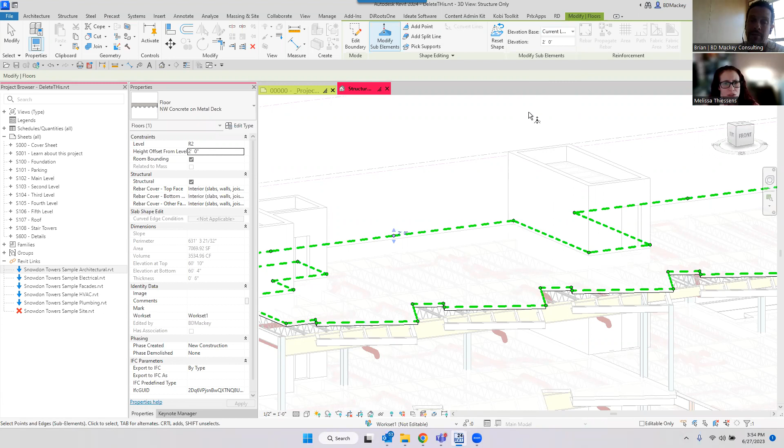And I don't understand why we don't have from relative position. Like, what's the relative top of that floor? I really wish we had that. Yeah, you're correct, Ryan. I agree. It's a pain in the ass. So if you go in there on the elevation, can you do the little math trick? You absolutely can do the math tricks. If you're like, oh, I needed to move this down 1'3" or 1'2" and 17/32, you can always do the equals and then come in the end and say, minus 1'2" and 17/32.

But that really starts to suck. That does suck. Because now you're like, oh, that should have been this. So it does kind of suck for that to happen. But yeah, that is what it is. I wish I could tell you something different, but no, that's what it is.

I think it's funny. Yeah. No, I was gonna say something, but it doesn't make sense. Never mind. Scratch that. Control Z.

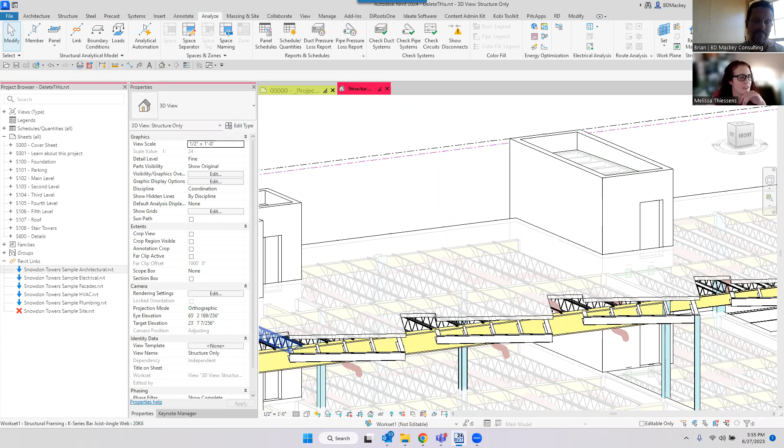Yeah, so that's a big sorry, that sucks. We commiserate with you, Ryan. Commiserate, but yeah, there's not a way I know around it. And the worst part is, even if you put a spot elevation, you can't change it from a spot elevation. So you set your spot elevation up when you're doing the modify sub, you have to grab those points.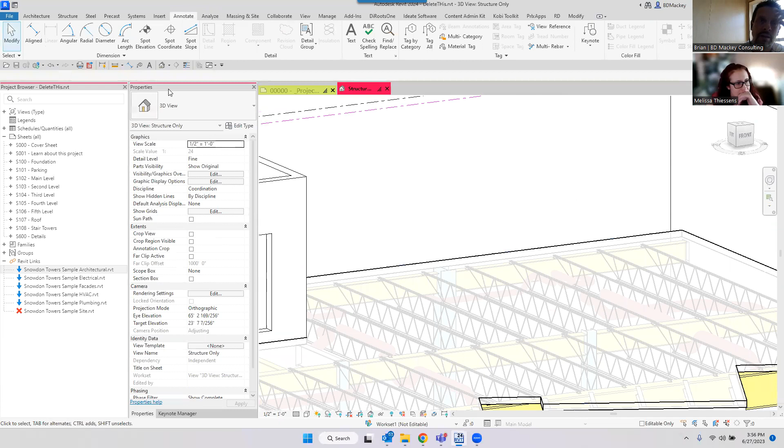Let's see, just out of curiosity, before I say you can't do that, annotate spot elevation. Can you do the one that shows the top and bottom? Point. Well, I just want to do this one and change it to, yeah, but see, it's still relative. You've got to say relative to what level. So I can just do actual, not relative, actual. Yes, but it's still going to be something. But let's just say relative to, what is that, the roof level, I think, or 2?

Sure, 0. Now if I do this and I say modify sub element and I pick that point, yeah, I can't use that dimension. I was wondering if that would work, because you pick the roof, you can get that dimension to move the whole roof up or down. But it doesn't allow you to use that value to move the sub element.

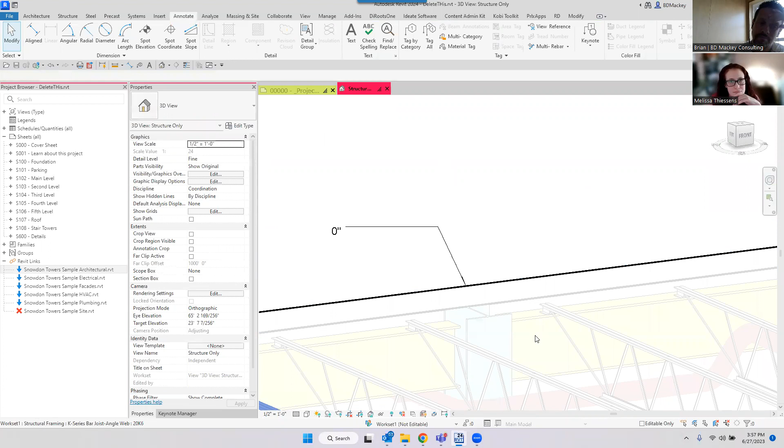So sorry, Brian, kind of a question, but really it was more of a, yep. That sucks. Boo. Well, sorry. Every once in a while, there's small things like that that make me glad I'm still kind of stuck in 22, but there's a lot more stuff that's making me sad that I'm still stuck in 22.

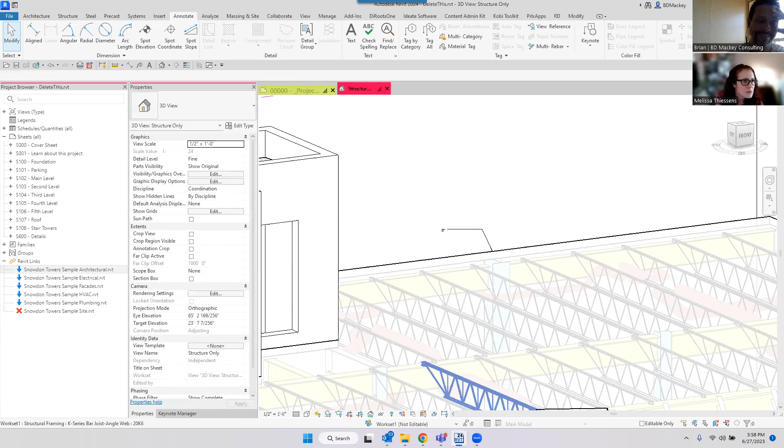All right, well, I guess with our 30 whole minutes, we have one question. From Jeremy, it says less of a question, maybe more of an observation I stumbled on earlier this week. Made a profile family using an ellipse. Used this profile in a railing family for the rails, top rail, and handrail. The rails displayed a seam along the length, but the top rail and handrail did not. Not a huge deal, but curious if you know how Revit thinks about these in the background that might explain the inconsistency. By the way, I made the profile families using bottom center, top center, etc., based on something you mentioned.

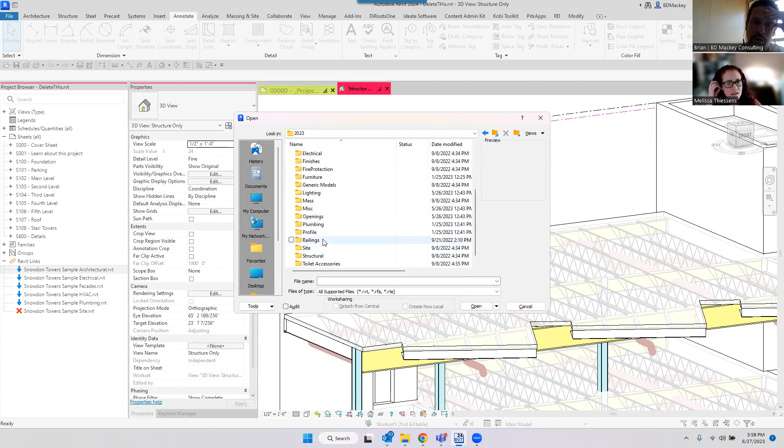Should have had 23 open before I started this. I don't know if I've ever seen the seam in. This won't take too long to open in 24. I have not upgraded all of my stuff to 24 yet. Railing, sample railing. I know I've seen it with round rails. I don't know if I have.

I'm trying to think on that because there are some times in Revit, definitely with round, because it sees a circle as two arcs. Revit actually can't create a circle. If you've ever noticed, you draw a circle and then it's like two arcs most of the time. I think they've fixed that over the years, but in the old days, in the old profiles, you drew a circle using the circle command, you got two arcs. So if your profile is really old, I believe it still will display that. But it never did that with ellipses. With an ellipse, it's still one single entity. It's not two arcs.

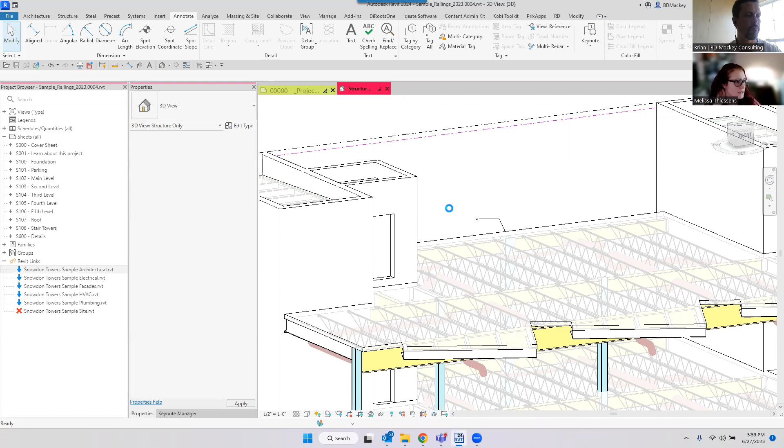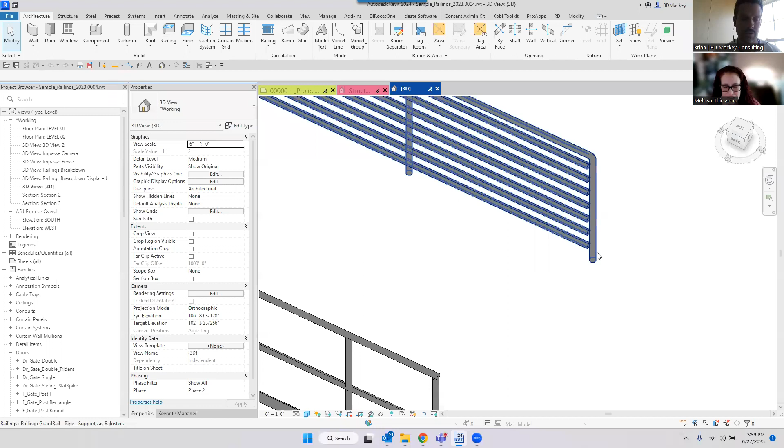Yes, it's nothing. 23 open, finish it from this way. I'm not saying if it is anything, yes or no. I'm just trying to put my head around it. Cause yeah, like in these ones, you can see that I've got these round and there's not a line, because I did redo my profile family from the one I had way back in the day to actually be a circle. Oh, let's just grab this one and let's change its profile.

So one thing for me that I've always done, you see, I don't have a round circle profile. Because ellipses can be circles if they're the same. Kind of like a rectangle can be a square, an ellipse can be a circle. So all of my stuff, I just call it round.

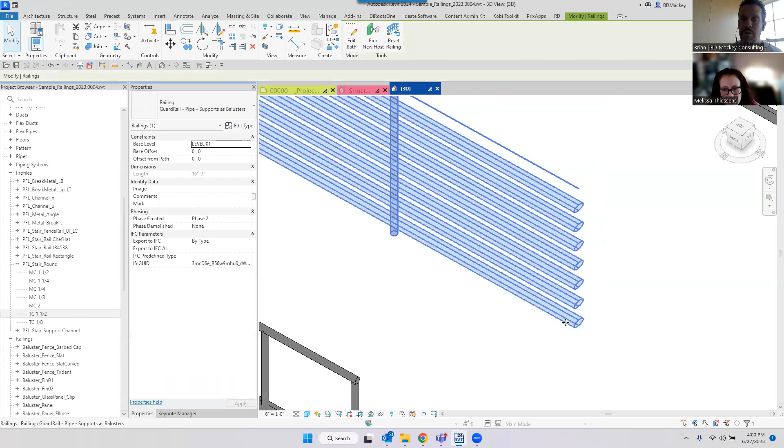Yeah, I'm not weird. So I'm not seeing it when it's used in a top rail, but I am seeing it when it's used in a rail sweep. So all of these are showing it because that's the rail sweep, right? So what I mean by that, if I go in and say edit family, right? The ones where you're seeing it are the rail structures. These are all using that profile. You're seeing it there. But if I come over here to that one, still not.

One that had to be getting used somewhere else. But here, where it's a top rail or a handrail, you're not seeing it. Back on the bottom, not on the bottom. So yeah, I think it's kind of old school Revit stuff. It's still making that as two curves or something.

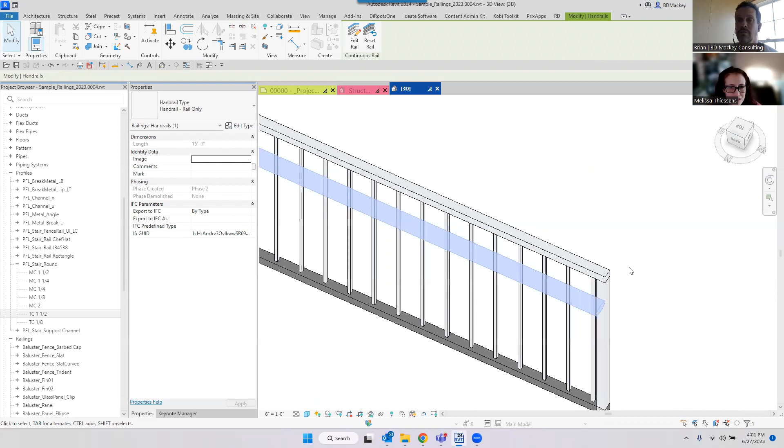But yeah, this one, it's a handrail, right? So if I, oops, let me cancel this. Let me grab the whole handrail. If I go into the type properties of this rail and we look at it, it's using a top rail or a handrail. I'm not sure which one. And that one is coming in and doing it there. So yes, you are correct. It is an observation, but if you use it in the rail structure, you're getting it, but not if it's a top rail or a handrail.

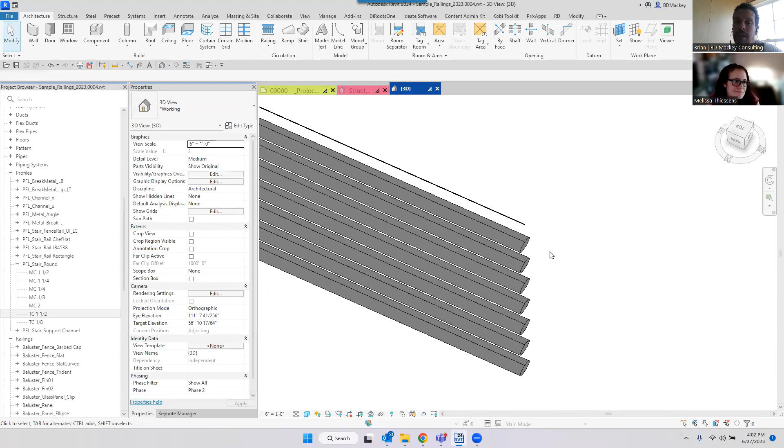So I think that's because they gave us more goodies with top rails and handrails, but haven't really touched the non-continuous rails. I think because top rails and handrails were new code and the rail structure was old code, and they probably just never changed it. It's a good observation. I think we should all screen capture that and send it to some people at Autodesk. Like, same profile, but why is it working? Why? Yeah, that's kind of funny.

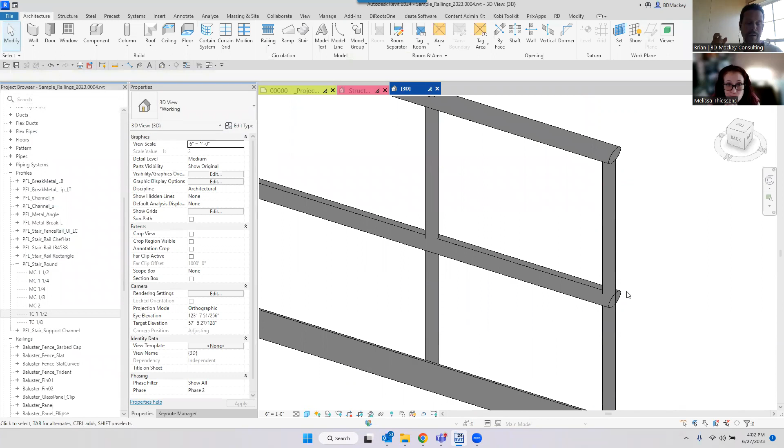Very interesting. Let's see, let's change. I gotta define this. Sure. I don't know what this is using, so just so I don't have to go crazy. That's middle. Let's go to TC. I know you're gonna delete my dimensions. Yeah, so not on the top rail, only on the rail structure. So very good observation, Jeremy. You were correct. But if you really wanted to eliminate it, and it was only on the top, you could switch that out to be the top rail or the handrail and you would eliminate that seam.

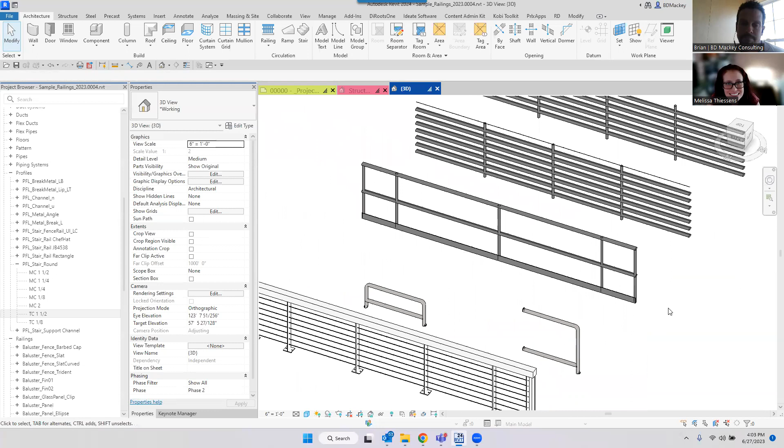It's a feature. But good on you, yeah, sounds like a solid code theory. Yeah, I don't know, something they did way back when. But good on you for making one profile that has different offsets on it. See, now I just blew you away also, Jeremy, because now you're gonna turn all your rounds into an ellipse. Yeah, you'll see. I have the same thing for columns, round. Oh, Jeremy's already ahead of you. I already had that. Yeah.

Yeah, well, there, because I gotta use diameter and radius, but I got diameter and radius here for vertical and horizontal. So same thing, I've got the diameter for horizontal. Again, if I make this something different, ooh, that's gonna be a tiny ellipse. There we go. Woo. So I always say ellipses can be circles. It's like a rectangle can be a square.